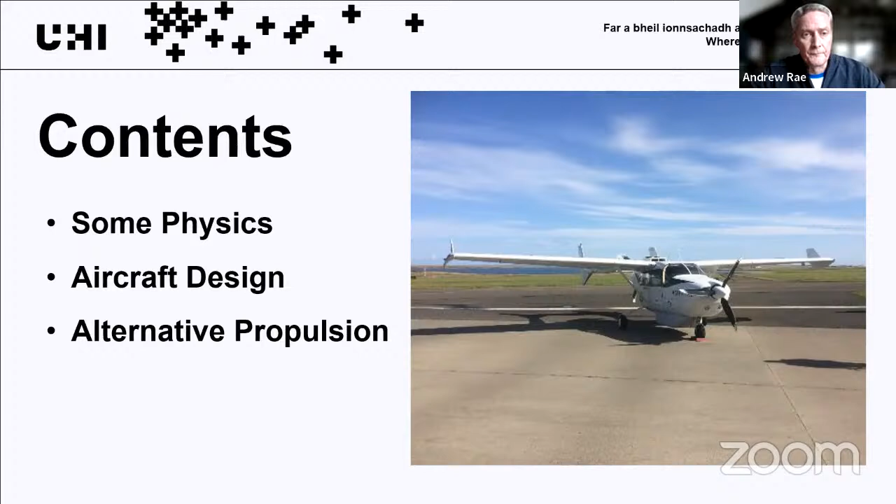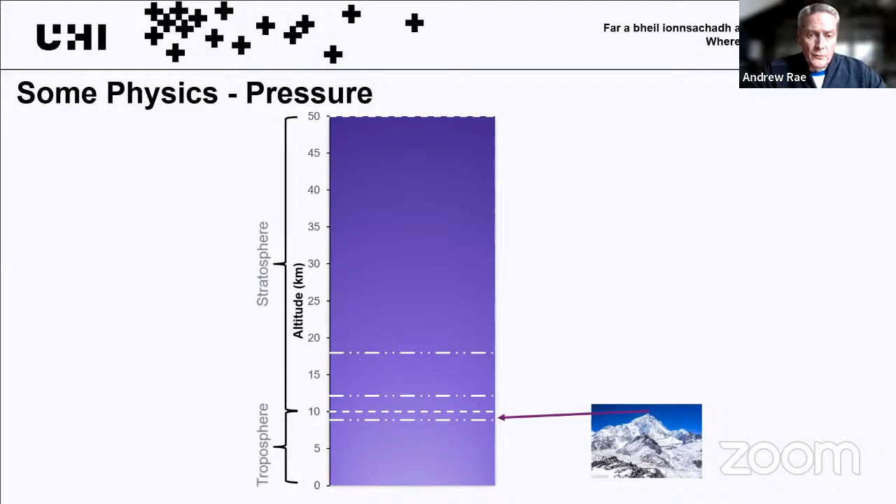So starting off with some physics and pressure. The Earth's atmosphere is split up into regions demarcated by height. The one that occupies most of us is the troposphere, which is up to 10 kilometers in altitude.

But most aircraft fly in the stratosphere. The A380 cruises at around 30,000 feet, plus or minus a bit, which is where most airliners fly these days. Everest is about 8 kilometers high. One of the few exceptions as far as aircraft was concerned was Concorde, which flew at 60,000 feet for a variety of reasons. Obviously, as you go up in altitude, the air gets thinner and the density decreases.

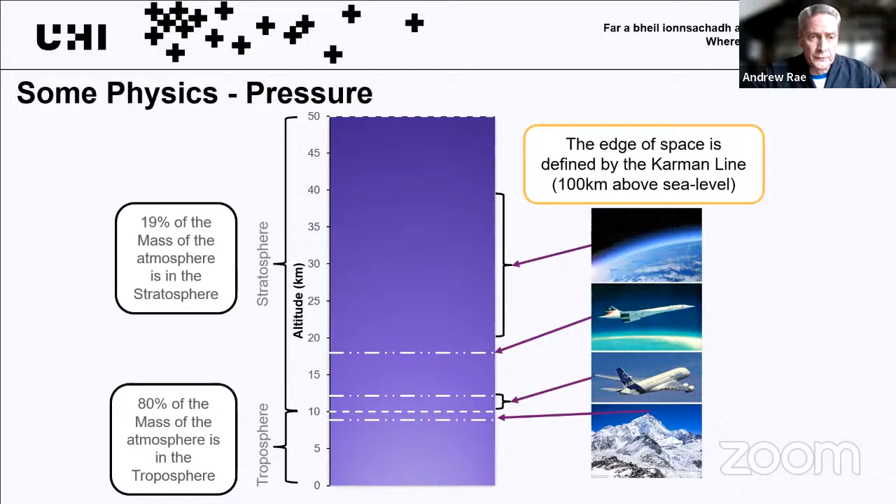So the mass of the air is changing, which has implications for lift, for drag, and for temperature, and I'll come on to those. The density of air is highest closest to the Earth, and decreases as you go up in altitude. About 80% of the mass of the atmosphere is contained within the first 10 kilometers altitude - that's the troposphere. Only 19% of the atmosphere's mass is in the next 40 kilometers of altitude, which is the stratosphere.

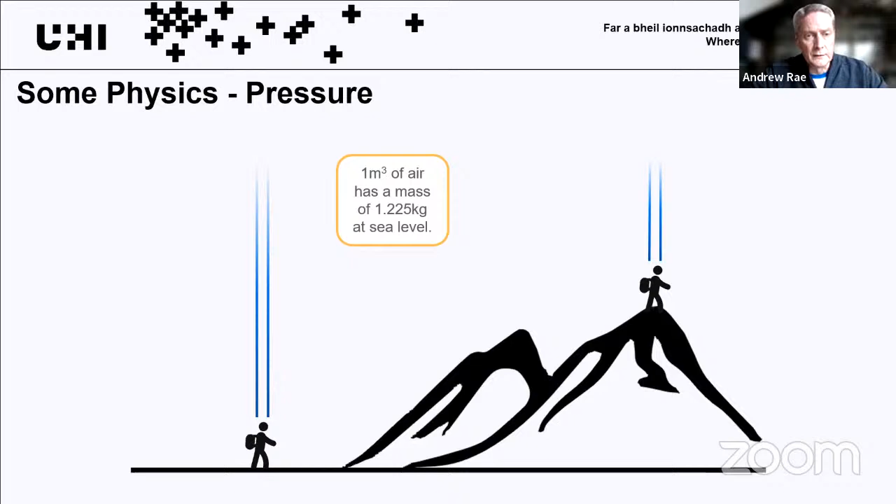So if you imagine a column of air extending from above your head to the edge of the atmosphere - each cubic meter of air has a mass of just over a kilogram at sea level, and that decreases. So to the edge of the troposphere at 10 kilometers, that's more than halved - it's down to 0.4 of a kilogram per cubic meter. And in the middle of the stratosphere, it's right down to 0.018 of a kilogram. So you can see how quickly the density reduces.

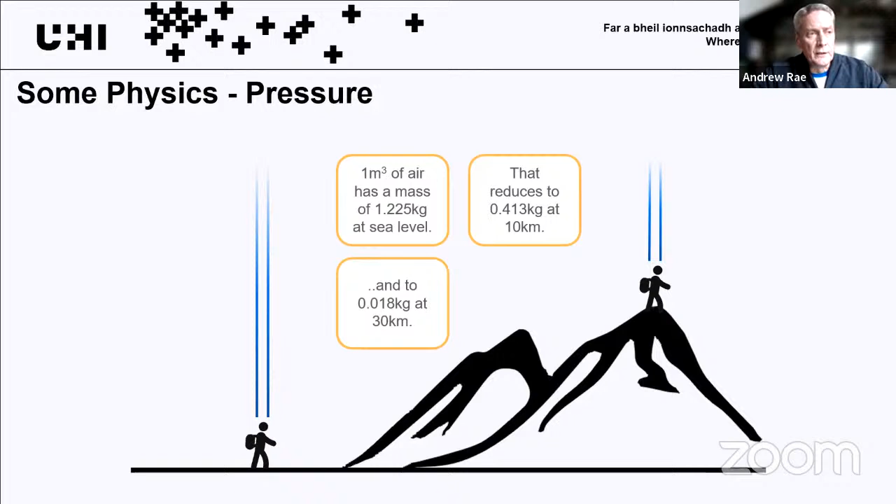If you were to integrate that mass from the top of your head all the way to the edge of the atmosphere, it's equivalent to 7 Ford Focuses - other small family cars are available - but that's quite a weight sitting on your head. Obviously, humans are designed to cope with that pressure, but if you were to climb a mountain, go up to the top of Everest, it's equivalent to only 2 family cars. So there's a massive difference in the density of the air as you increase in altitude.

And of course, you'll all be aware of how that pressure varies. If you climb a hill in a car, your ears pop, or if you go up in an airplane, your ears will pop, and that's to do with the drop in density and therefore the drop in mass above your head, and the pressure.

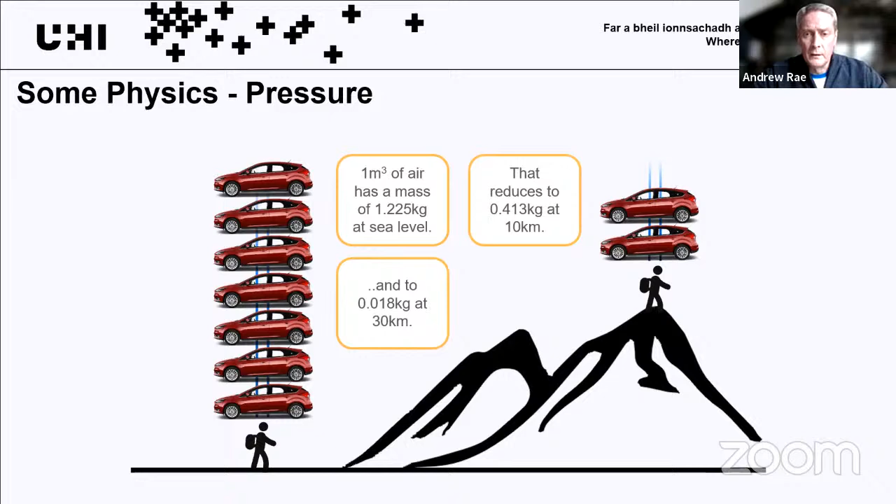So the other thing that varies with altitude is temperature. As you move away from the Earth's surface and the heating effect of that surface, the temperature drops, and it drops quite significantly to well below 0 as you go up in altitude.

There's several different temperature scales that we use. We use degrees Celsius and Kelvin. Fahrenheit is an interesting one. I think 0 Fahrenheit is the freezing point of brine, and the upper point was Mrs. Fahrenheit's armpit, which is probably not the most scientific of datum points, but I think it was changed shortly afterwards to come up with something a bit more constant, perhaps.

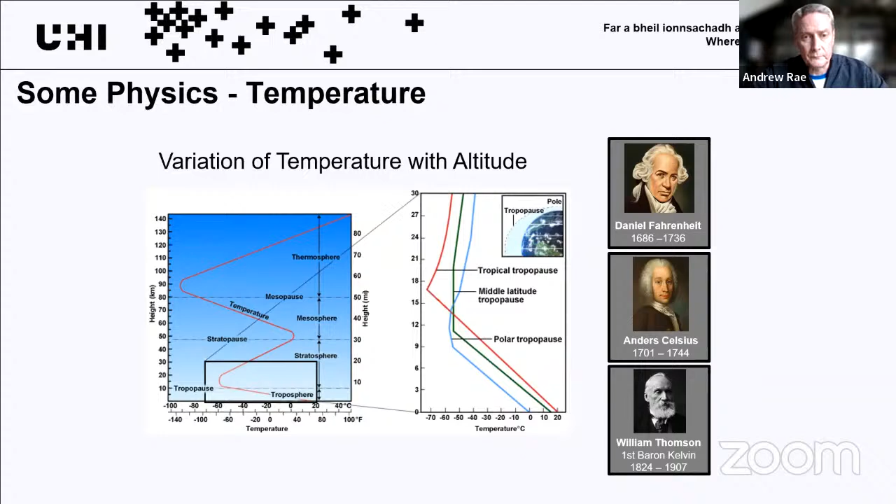Temperature is important because something like Concorde, which flies very fast, has a lot of what's called kinetic heating, so the friction of the air on the surface of the aircraft heats it up. The reduction in temperature at altitude helps counteract that kinetic heating and stops the aircraft expanding too much or getting too hot. I'll touch on friction a bit more shortly.

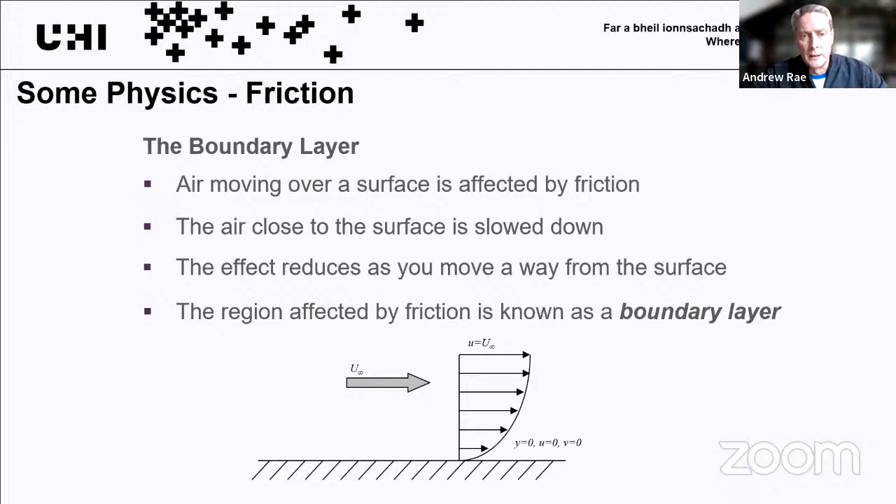Aircraft wouldn't fly without friction. Any two objects moving adjacent to each other will have some degree of friction, and air is no different. It may feel nice and thin and gaseous, but actually there is friction. As the wind blows, you'll have felt it on your face. What that does is reduce the speed of moving air close to a surface, and the area affected by that friction is what aeronauticists call the boundary layer. That's a significant part of aircraft design — understanding and adapting that boundary layer.

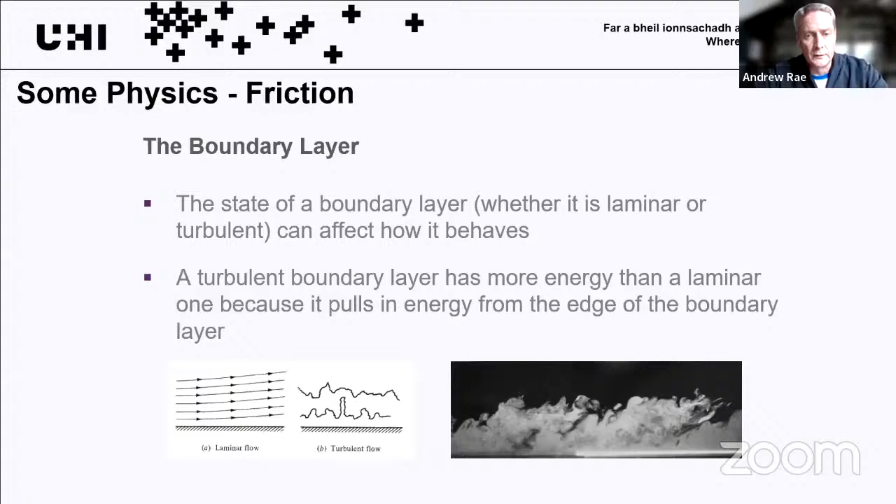Obviously it's not a wire — it's quite tricky to put a wire around a small ball, especially if you play golf as badly as I do, since the ball will be spinning and the wire won't be in the right place. But by putting dimples on it, we create that turbulence, reduce the wake, and the ball will go further.

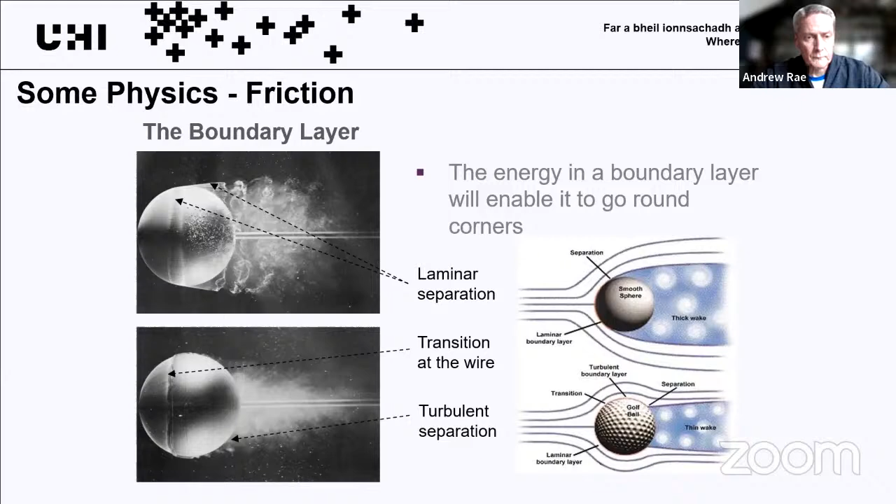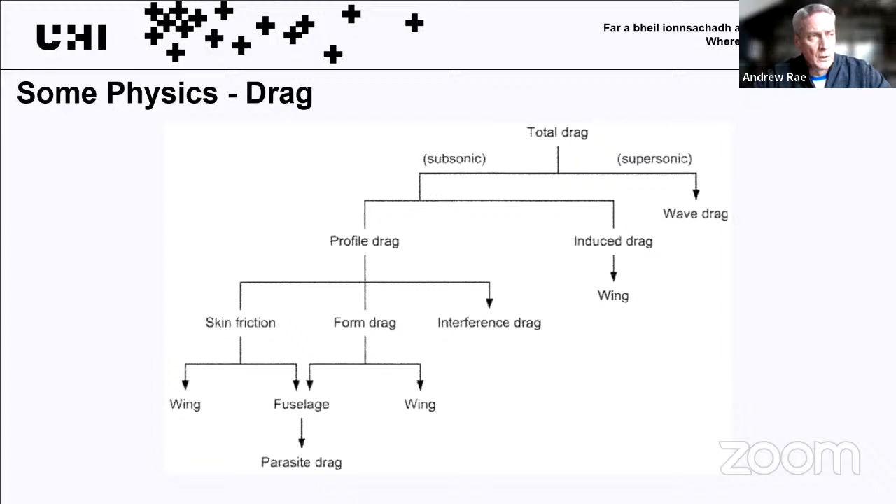On the left-hand side here, looking at subsonic aircraft, the skin friction is the boundary layer. Form drag is the shape, so whether it's streamlined or not, and interference drag is caused by junctions, for example where the wing meets the fuselage or where the engine pylon meets the wing. So there are several sources of drag, all of which need to be minimized.

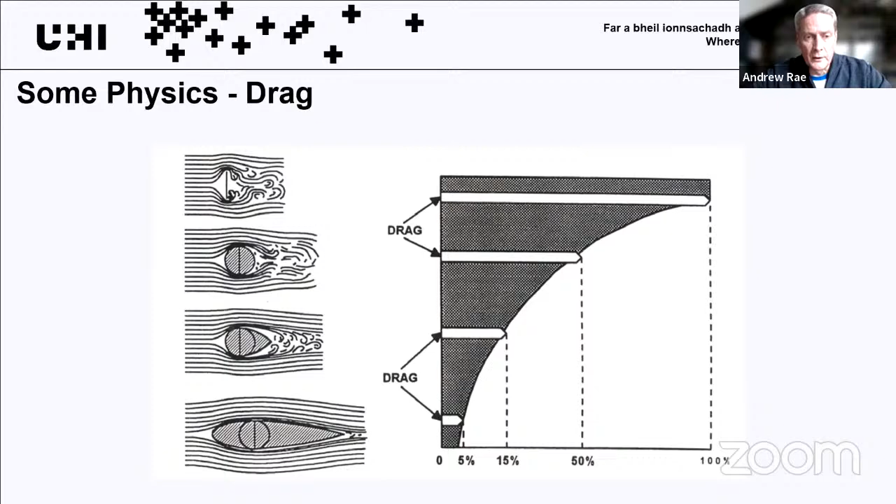Just a little schematic diagram to show how streamlining can reduce drag considerably. If you take a flat plate and put it sideways onto the air, as the top picture shows, you get a very large wake and a lot of drag. If you progressively make that flat plate more streamlined, turning it into a sphere, then a teardrop, then an airfoil shape, you can get down to less than 5% of the drag of the flat plate, even though it's got the same frontal area. That's a lot of the reason why cars are streamlined, and why aircraft are streamlined where they can be.

In straight and level flight, the lift you need will be equal to the weight, and the thrust from the engines will need to equal the drag of the aircraft. The lift and the drag both vary with what the aircraft is doing.

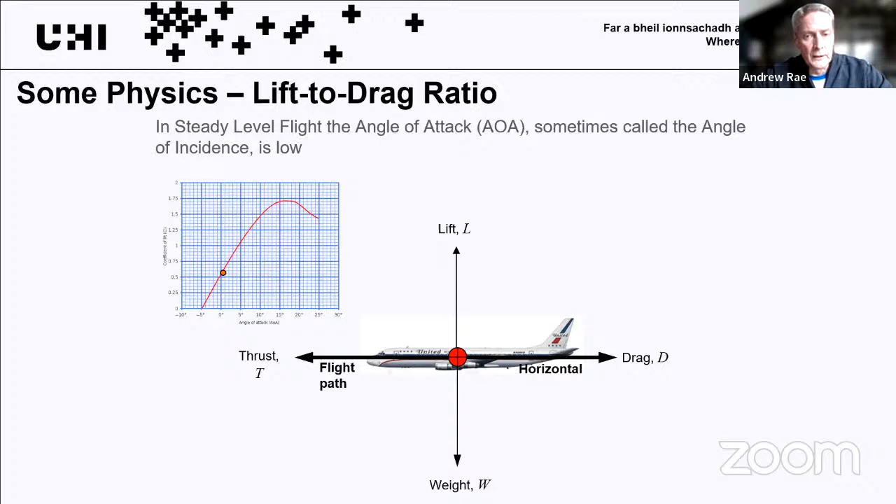If we pitch the aircraft up, maybe to climb, we increase the angle of attack, we also increase the lift, and therefore also increase the drag.

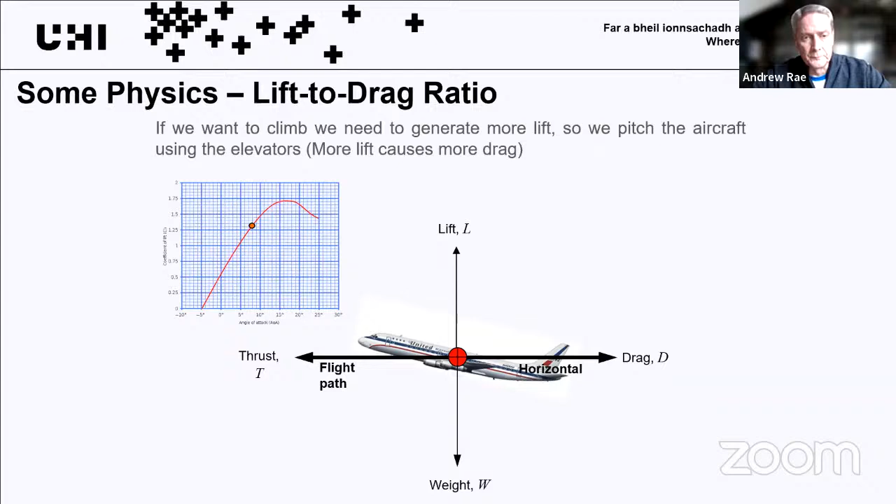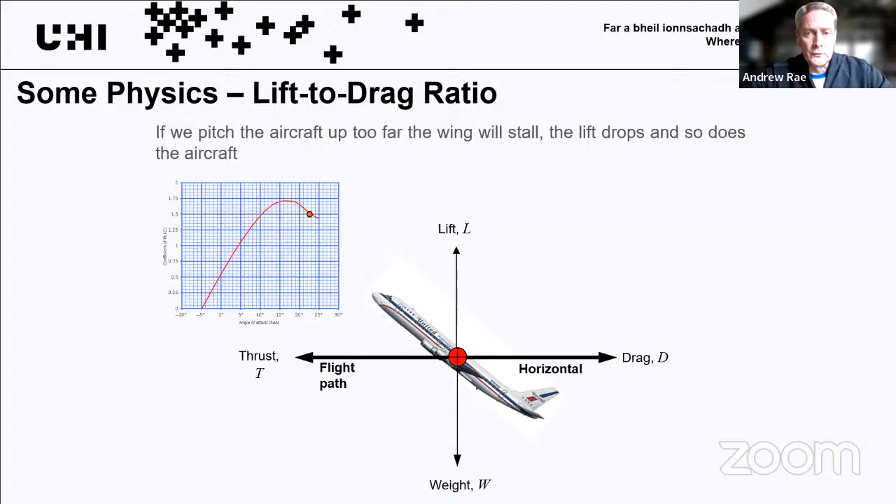If you take that too far, you can stall the aircraft, so the lift drops, but the drag goes up massively. The lift drops, and so does the aircraft.

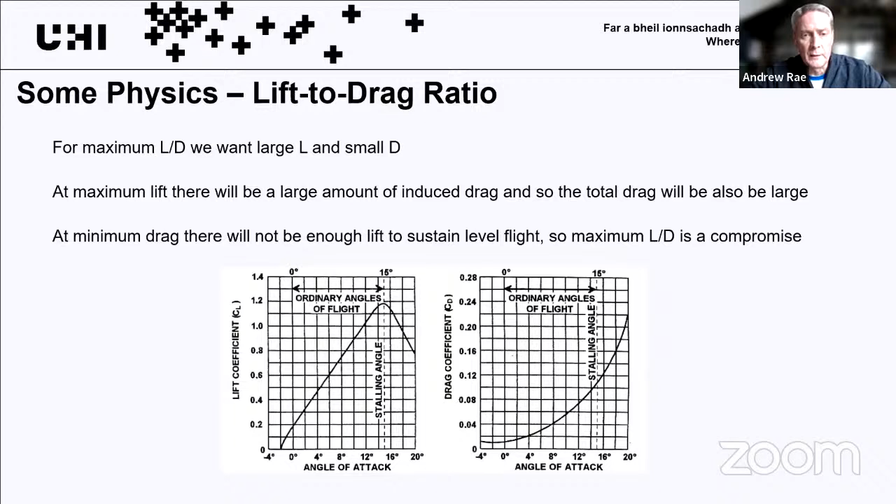Lift and drag are related, and an evaluation of the efficiency of an aircraft is the lift to drag ratio. The bottom left-hand picture shows the lift increasing with angle of attack, and on the right shows how the drag increases with angle of attack as well. Both increase with angle of attack, but they do it differently.

As you plot lift against drag and angle of attack, you find there's a sweet spot, which for most civil aircraft is around about 2 degrees angle of attack. Most wings on most airliners are bolted onto the fuselage at about 2 degrees because that's where they operate most effectively in cruise.

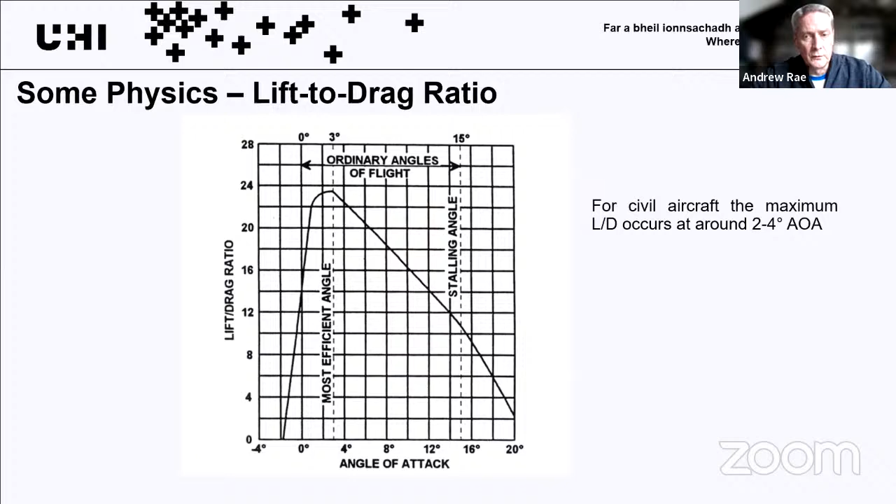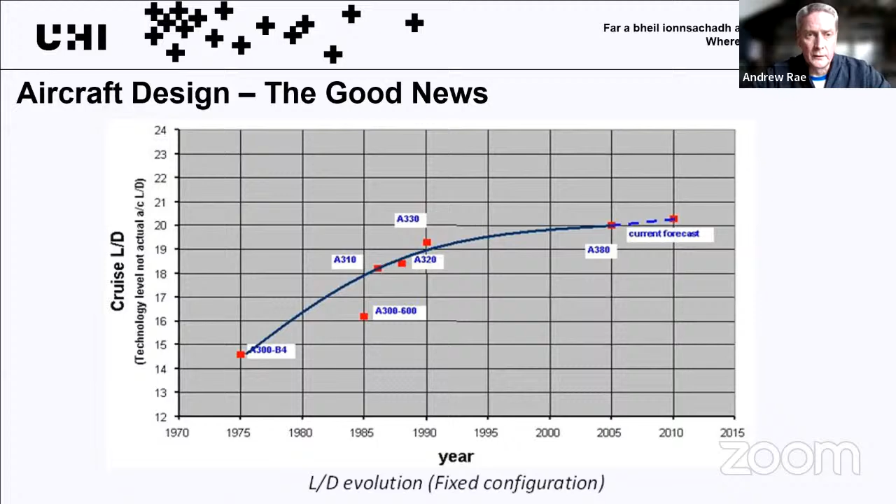What that means is that for the same lift, the drag has dropped by about a third. And that's good news because you need less thrust to overcome that drag, so you burn less fuel. But this was done not so much from a sustainability point of view, but more from a reducing cost point of view. So that's one of the things that's changed in the last decade or so. That's the good news.

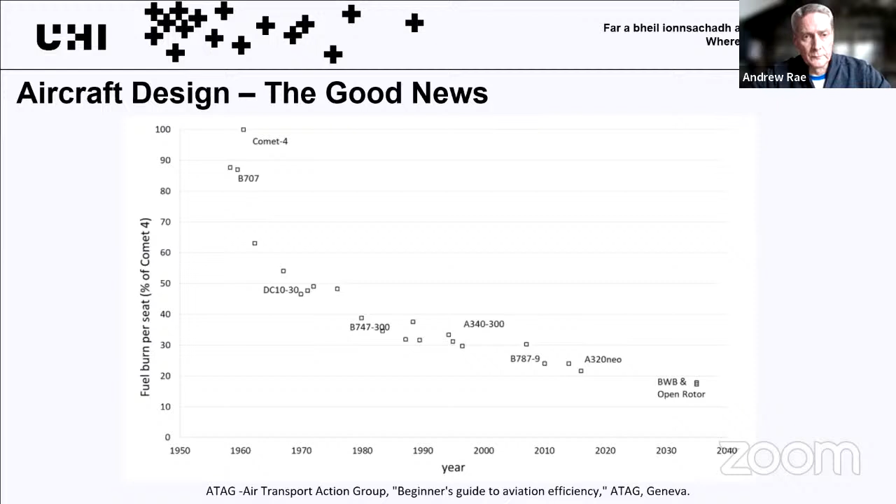The other thing is that efficiency has increased. If you take the amount of fuel burnt per passenger per kilometer, you see the downward trend since the first jet aircraft, the Comet 4 and the 707, are top left there. If we take the Comet as 100%, then the A320 is down around a fifth of that fuel burnt per seat per kilometer. That's a massive saving. So the efficiency's gone up, the fuel burn's gone down. As I said, that was largely to do with cost.

Bad news is that the number of people flying has gone up massively. The number of aircraft in the sky has gone up massively.

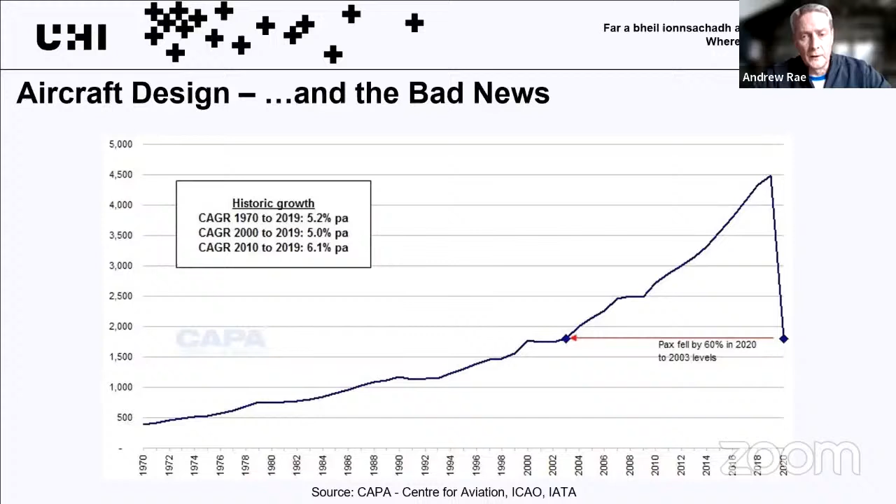Since the 1970s, there's been a tenfold increase in the number of passengers flying. Obviously COVID affected that, but even then it only fell back to 2003 levels of passengers flying.

Predictions are that if nothing else changes, that upward trend is going to continue. There's a massive increase, depending on which forecast you believe, but there is always going to be an increase in air traffic. So we need to do something.

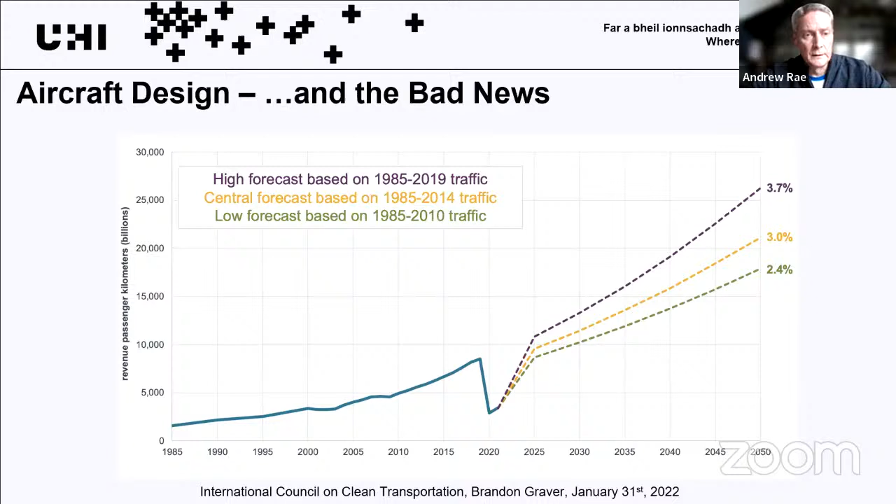It's not just the amount that's being burnt, it's where it's being burnt. Burning kerosene at 30,000 feet is not a good idea because of the particles that come out of the engine from the burnt fuel, and contrails that form which also help affect global warming.

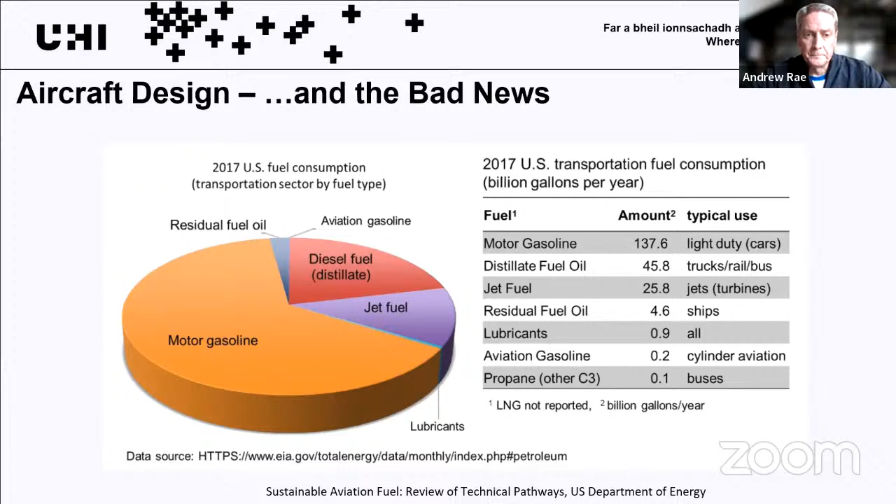As you're probably well aware, governments have latched onto this and are incentivizing aviation companies, aircraft builders, and engine companies to do something about it. Aviation needs to change - we can't carry on doing what we're doing. So the desire to try out alternative powertrains especially has come front and center. We're now doing it for the battle on climate change rather than to reduce costs.

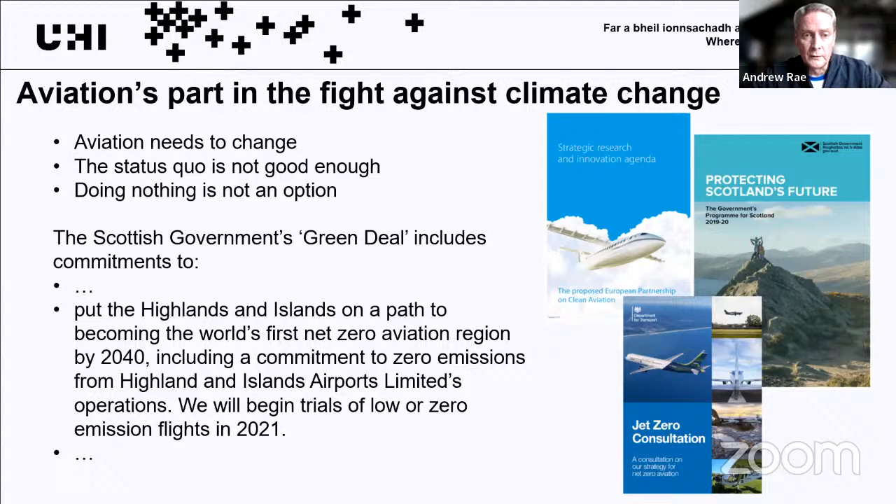Included in that set of reactions has been the Scottish Government's Green Deal, which has mandated Highlands and Islands Airports Limited to create a zero emissions aviation zone by 2040. That led to the setup of the Sustainable Aviation Test Environment project, which you may have seen David Holden, Dougie Cook and others talk about today as well.

The trouble is there's no silver bullet to replace the burning of dinosaurs. The most common proposed alternatives include hydrogen as a fuel, in two forms: liquid at cryogenic levels, or as a gas.

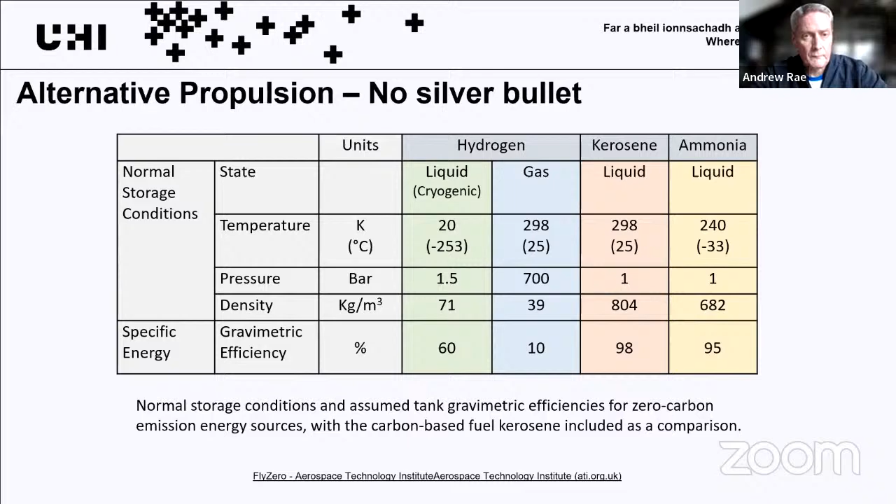If we concentrate on hydrogen, the other proposed alternative is sustainable aviation fuel. That's a kerosene-like substance which isn't a fossil fuel - it's grown from various feedstocks, including biomass.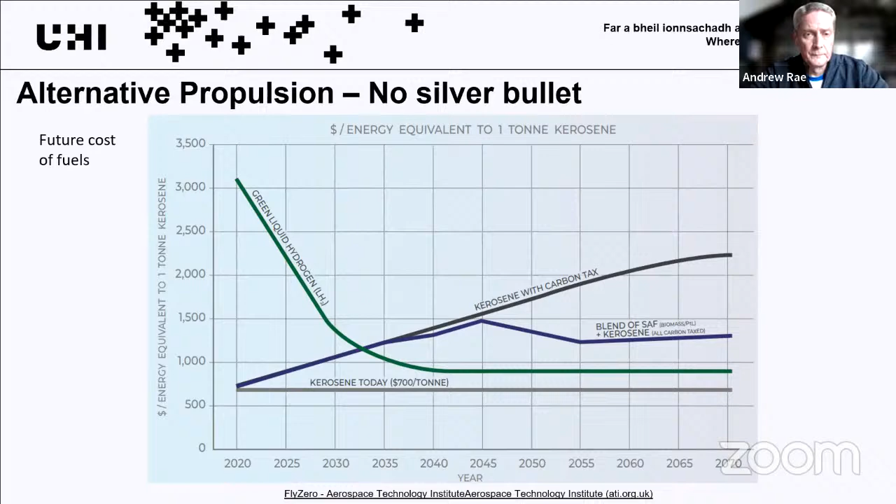Currently the cost of hydrogen is massive compared with kerosene - the grey line at the bottom is kerosene. It's a bit of a catch-22 situation because the amount of hydrogen being produced is quite small, so the cost is high, so it's not being used very much. We need an economy of scale and some way to kickstart that reduction in cost. But even at scale, liquid hydrogen will be more expensive than kerosene is today, so there will be a cost implication here even if we can solve all the technical issues.

This chart really shows the challenges for aircraft designers. On the bottom axis is the mass energy density of fuel - how much bang you get per kilogram. On the left-hand side is the volumetric energy density - how much bang you get per litre, per unit volume. Ideally you'd like something with a lot of energy per litre and a lot of energy per kilogram, because then it won't weigh much and it won't take up much room.

Kerosene is in there too - that leads you to the top right-hand corner of that graph, if you had the perfect fuel. Kerosene is quite good from a mass density point of view, and it's very good from a volumetric point of view.

Draw your attention to the bottom left, which is where you've got lithium-ion batteries. They are neither volumetrically nor mass efficient - they are heavy, and the energy density per kilogram is not great, nor per volume. So they will probably be limited to small aircraft.

On the right-hand side at the bottom, we have hydrogen, liquid and gaseous. They are energy mass efficient - they're on the right-hand end of that bottom curve - but they are volumetrically challenging, at the bottom end of the y-axis there. So these alternatives all have consequences for aircraft design, which I'll come on to.

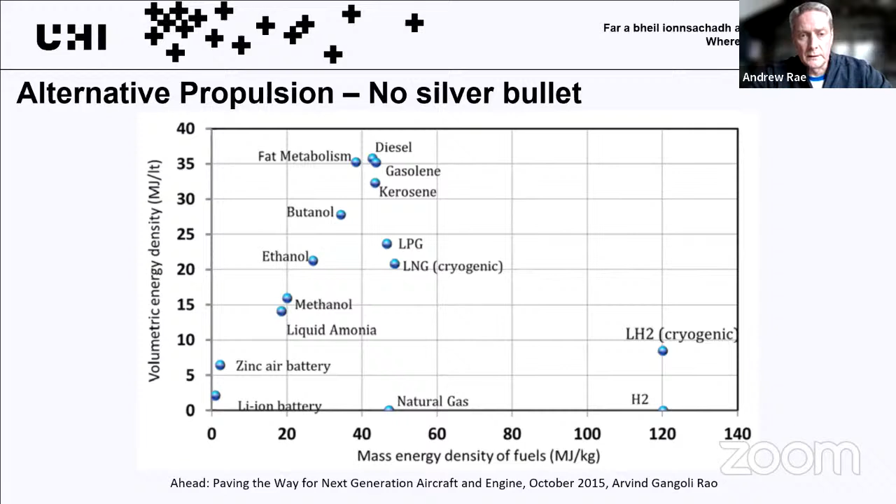Hydrogen is being proposed in two ways generally. One is to use it as a replacement for kerosene, burning it in a combustion chamber in the same way you use kerosene or avgas now.

The trouble with that is that you're still burning air, so the fuel-air mixture is still burnt, and so you're producing a lot of the particles and greenhouse gases that current gas turbines produce.

The right-hand side there shows an alternative, which is one that the likes of ZeroAvia are doing. They have a hydrogen fuel cell which drives an electric motor. So that's a much cleaner way of doing it, but you need to be able to refuel the fuel cell to keep producing the thrust.

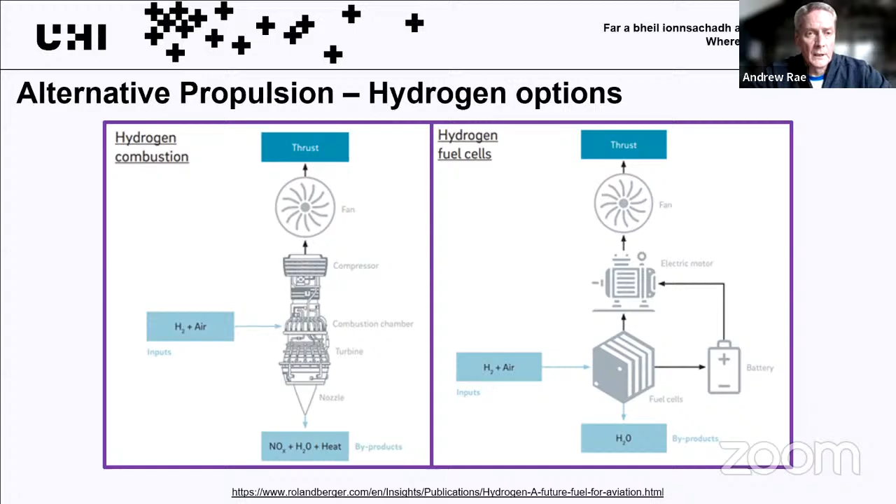So I've mentioned the volumetric challenge. So 2 aircraft here, the ATR, which you'll be familiar with if you've flown with Loganair recently, and then the A320, which is the common mid-sized aircraft. The coloured blobs there are the volume of fuel tanks you'd need to replace kerosene. It's not too bad on something like the ATR 72, which is short range - the volume is bigger for these alternative fuels, but not massively bigger. That's not true for longer range aircraft like the A320, and it's even worse for intercontinental aircraft. You can see the size, or a representation of the relative size of the fuel tanks in the coloured blobs at the bottom, bearing in mind that you need 2 of these to give you enough fuel for your mission.

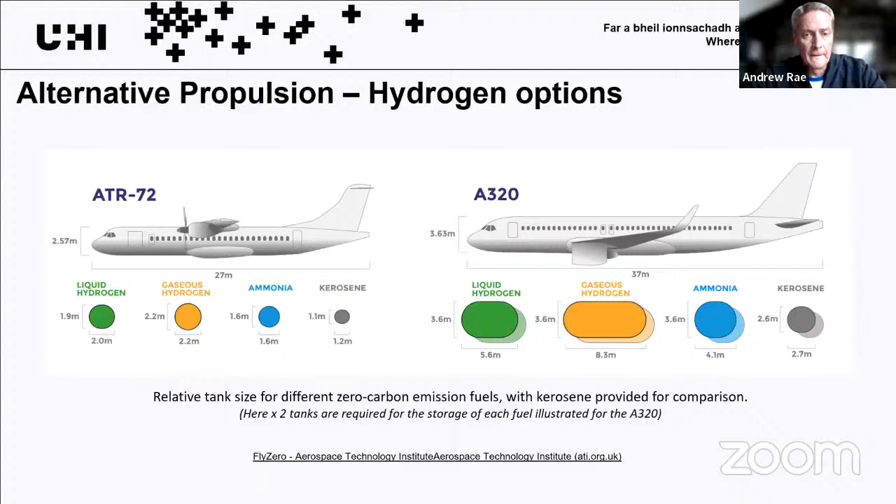And hydrogen's tricky stuff. It's a single molecule, which means it's really hard to keep it in one place. It likes to leak through any gaps or even through most materials, and that has issues for safety and maintenance. So if hydrogen wants to get out of where you're trying to keep it, it will collect elsewhere. If you're doing maintenance in a hangar, for example, on a fuel tank, and you vent the hydrogen, it will find its way to the ceiling, which is where most of the lights are, and one spark will set it off.

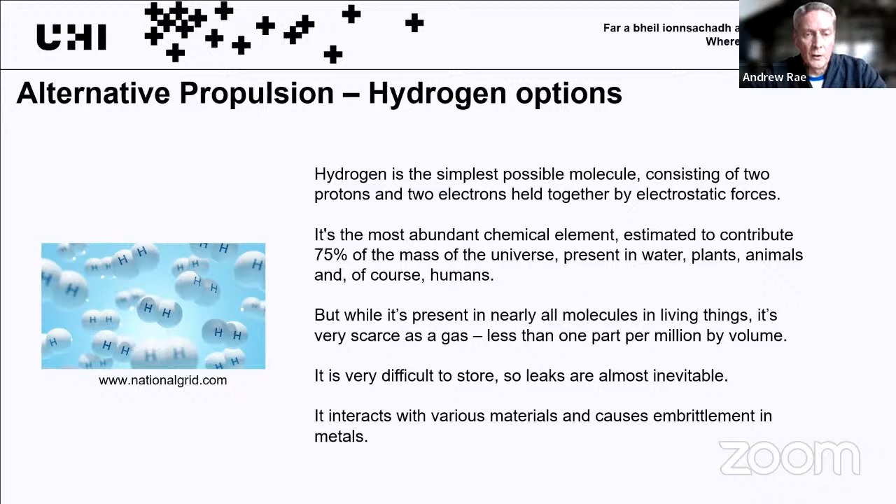So it's very abundant, but actually getting it into gaseous form is quite hard. And it also has the nasty trick of interacting with other materials. So those of you familiar with the oil and gas industry will have heard of hydrogen embrittlement of pipelines, for example - the hydrogen in the hydrocarbon embrittles the inside of a pipe and makes it won't be able to withstand the same loads or vibration or similar things.

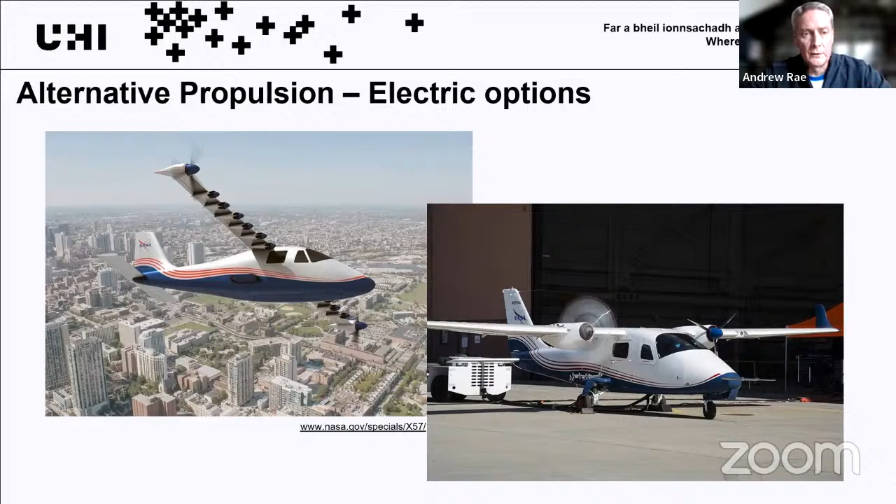The current reality is somewhat different. The bottom right-hand picture there is the actual aircraft. It's not quite got the distributed electric propulsion, but it does have an electric powertrain on it. So small steps towards a more ambitious target.

So have you ever seen the inside of a battery, a large lithium-ion battery cell? It is a collection of hundreds, if not thousands, of AA cells all linked together. One of the problems which you've probably all seen is thermal runaway - once a lithium-ion battery starts burning, it's very hard to put it out.

It also suffers from traditional battery ailments such as charge memory. So if you don't cycle it correctly, you can damage the cells and it won't charge fully. At the moment, lithium-ion batteries are thought to have a lifetime of about 2,000 to 3,000 recharging cycles, which if you're using an aircraft every day, means that after about 6 years, you'll need a new battery.

And the other big problem is the constituent materials. In the chart on the right-hand side, there is a list of component materials within a lithium-ion battery. Some of them are rare earth elements, and the clue's in the name - these things are difficult to get. There is a limit to how much there is of them, and in some cases where they come from is going to be a challenge. So electric is not a perfect solution in the same way that hydrogen is not a perfect solution.

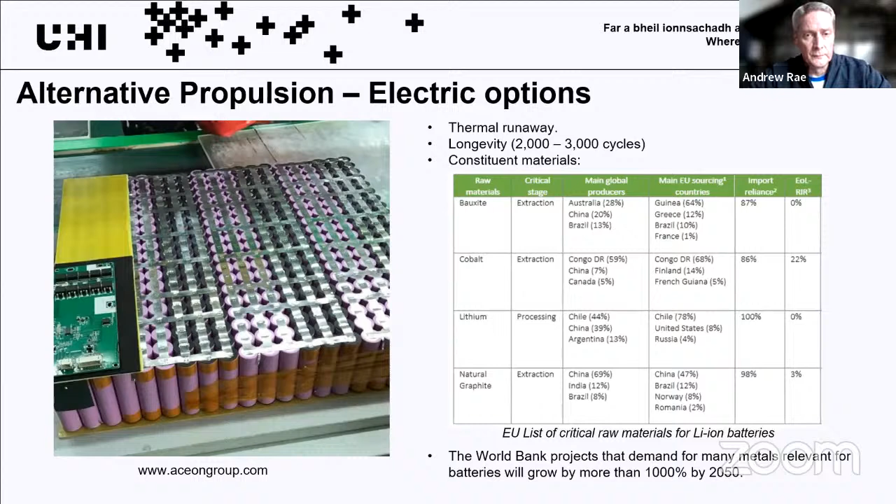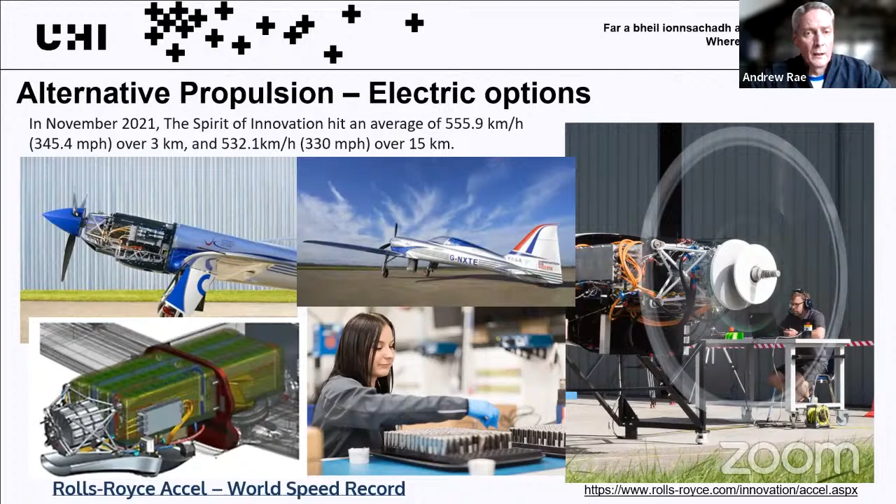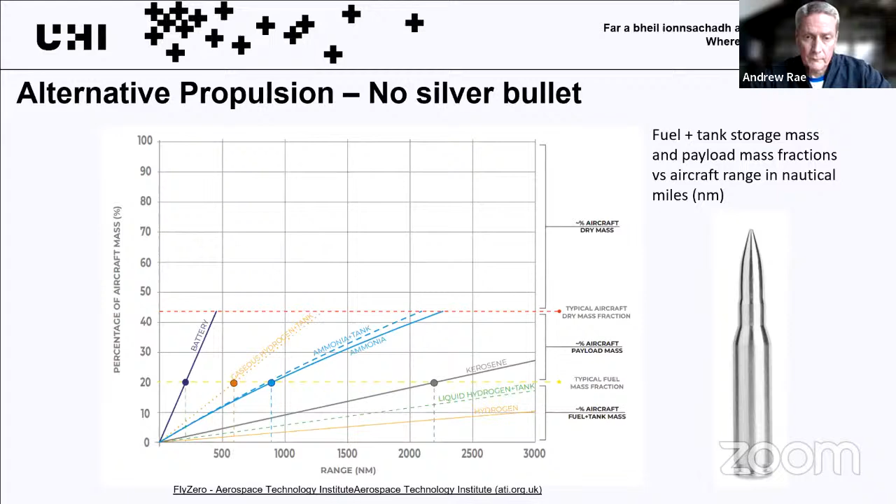Hydrogen electric, as with the ZeroAvia one, will give you more range, but still not huge. At the moment, the only foreseen solutions for longer range aircraft are either hydrogen or dropping in sustainable aviation fuel as a direct replacement for kerosene.

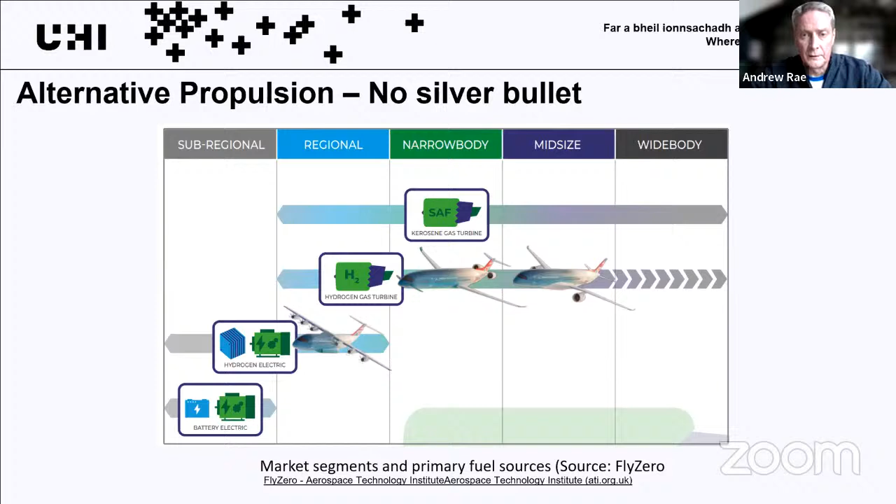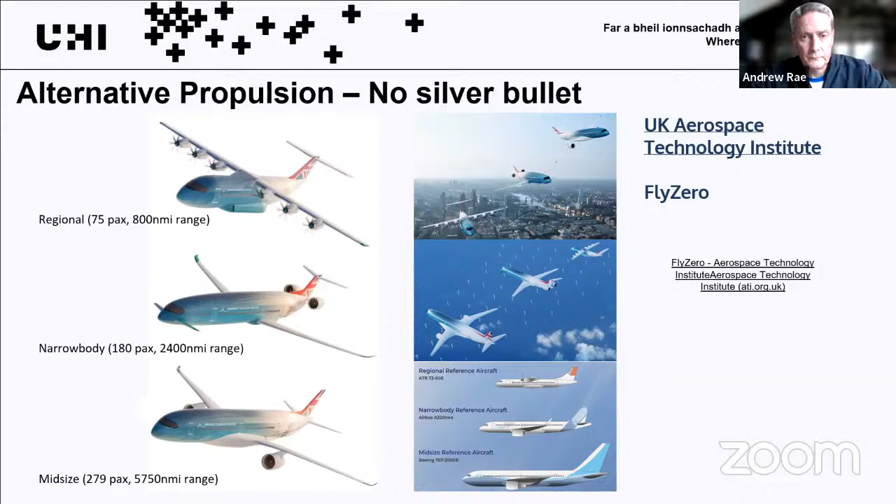Next slide, please. But remember, the volumetric problem of hydrogen means you've got to have massive fuel tanks. This is a section through one of those concepts, the medium range one, if I remember rightly. You can see the green areas are the hydrogen fuel tanks - so they are rather large.

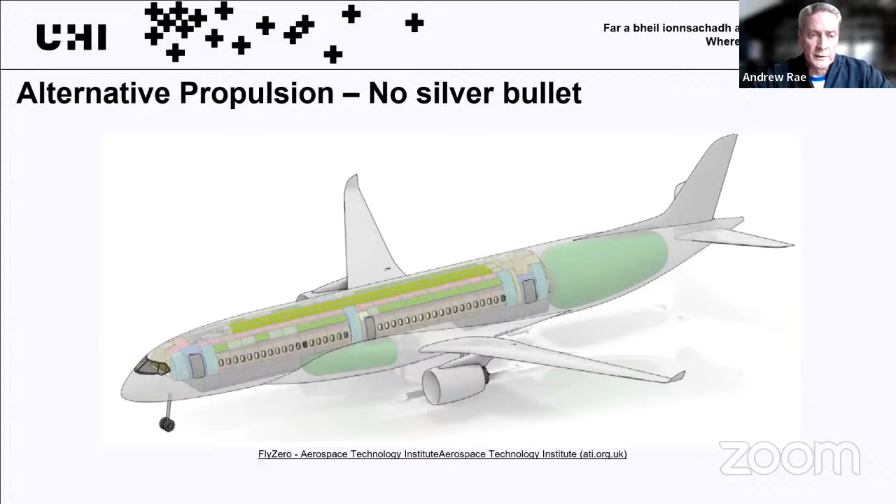That's assuming that you can come up with materials to safely store hydrogen in an aircraft right next to a passenger cabin, that you can refuel it happily, and that it won't leak into places you don't want it to leak. Next slide, please.

But we have to start somewhere, and so ZeroAvia are pioneering hydrogen-fueled aircraft, and will bring their Dornier 228 hopefully to Kirkwall in the next 2 years as part of the SATE project. We've already had Ampaire's hybrid electric aircraft, which is a modified Cessna 337. The front engine here has been replaced by an electric motor, while the rear engine is still a conventional Lycoming avgas aircraft. The reason for the 337 was because it gives you twin engine safety, but the two engines are in line, so you don't get any asymmetric control problems with an engine failure.

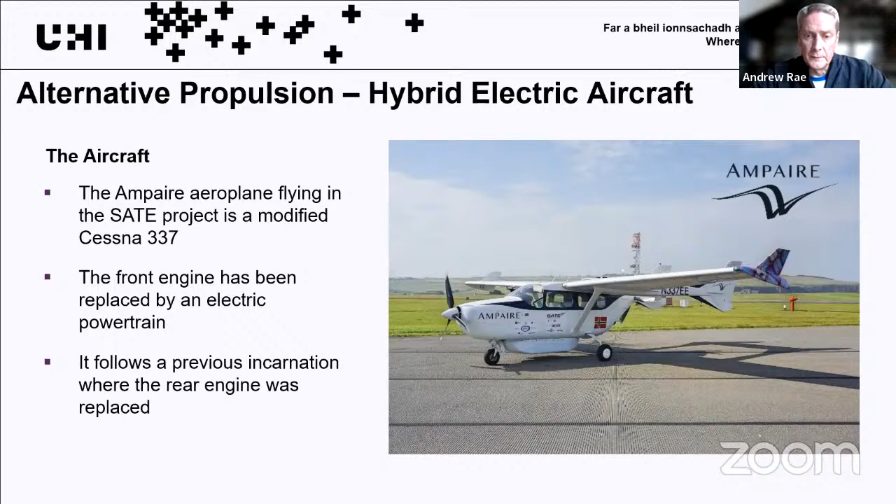One of the problems we had was that this setup is somewhat lighter than the Lycoming engine it replaced, and normally we'd move other bits around to compensate for that change in center of gravity. The easiest thing would have been to move the battery pack forward, but the nose gear was in the way, so we were limited. In the end we had to put a cast iron plate in the engine bay to balance the aircraft back out. It's the first time in my entire aircraft design life that we've deliberately added weight to an aircraft rather than trying to take it out.

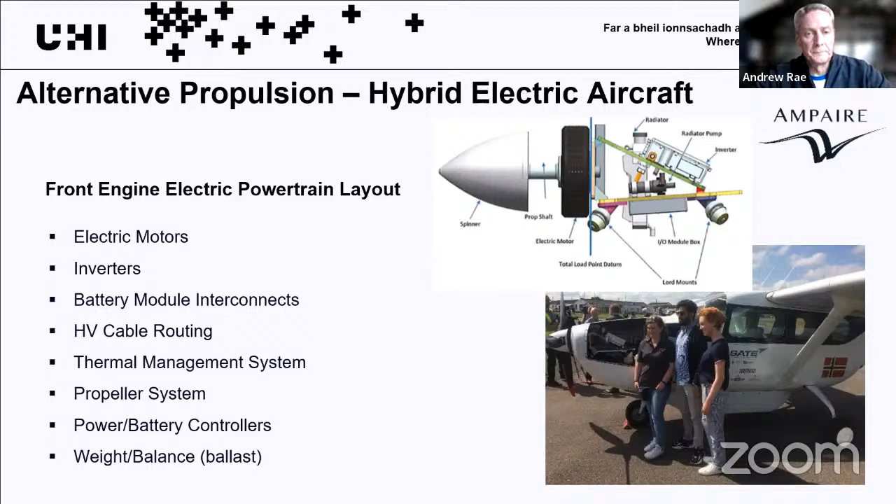Just some nice videos of Ampaire's aircraft. This is flying in California. It did 24 flights over a period of about a month. Nothing failed, and it accumulated 33.5 flight hours.

Ampaire are based at Hawthorne Airport in the US, in Los Angeles, which, for those of you who are an anorak like me, is where Northrop used to be based. It's where the flying wing concepts were first developed and test flown.

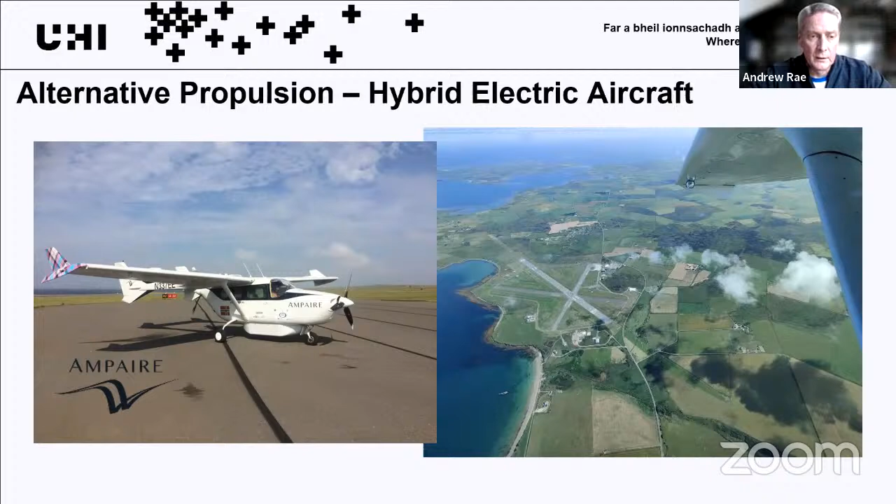Once we'd finished in Wick, we took the aircraft down to Devon and Cornwall. The aircraft was fitted with a US transponder which broke somewhere near Perth. It landed at Perth, had a replacement UK transponder fitted, then flew down to Exeter and did flights between Exeter, Newquay and Land's End. So the aircraft has flown literally from John O'Groats to Land's End, and that 418 nautical mile flight from Perth to Exeter was at the time a world record.

It's been broken by the same aircraft flying from Los Angeles to Oshkosh to take part in AirVenture just last month.

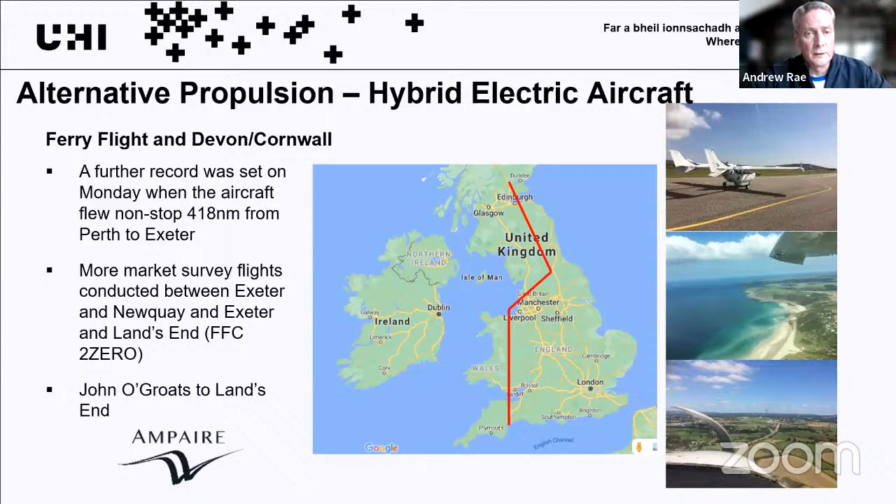Some of the more mundane challenges that exist: as with electric cars, unification and standardization of charging is going to be critical. There's no point having an electric aircraft if you land at an airfield and you've got the wrong plug on the end of your charger. It won't fit in the wall.

SAE, who look after a lot of automotive and aviation standards, are working towards standards for electrified aircraft propulsion. A lot of that work's been done in the US, and Ampaire is actively involved in that. It's not only the shape of the plug, it's the voltage you use and the safety systems around it.

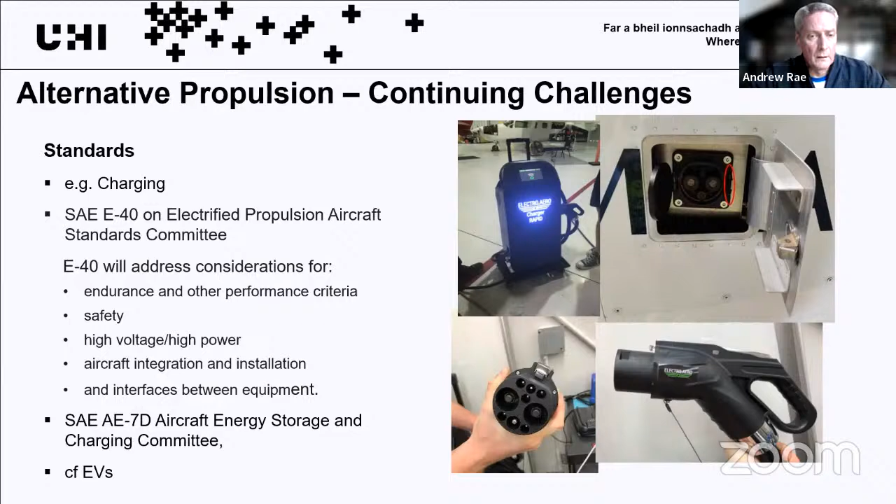Some of this was touched on earlier, especially with David Holden's talk around infrastructure and energy. It costs money to install charging infrastructure for electric aircraft, and it costs money to install electrolyzers for creating hydrogen. So how does an airport that has to pay for that get its money back, while at the same time not putting people off from buying and running zero carbon aircraft?

Why would an airline buy a more expensive aircraft? So there needs to be a bit of carrot and a bit of stick to incentivize the airports and the airlines, and passengers even, to use these aircraft.

There's no point having zero carbon aircraft if that energy doesn't come from renewable sources. One of the excellent things about flying in Orkney is that we have access to lots of green energy. There's the electrolyser, the hydrogen production plant on Eday, and lots of other interesting renewable activity going on in EMEC with wave and tidal as well.

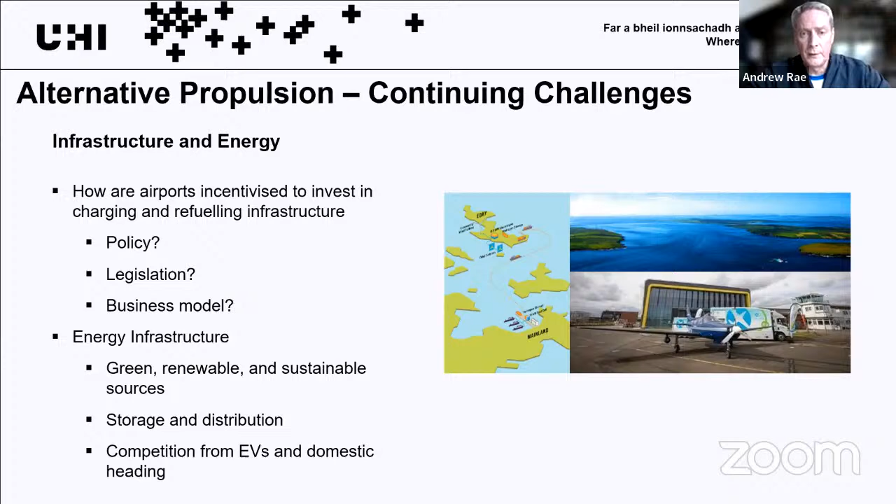But that's not going to be so easy to achieve in other geographies, more landlocked or more urban ones. So that needs to be understood about how that entire energy system links together, especially if aircraft are competing with electric vehicles for their electricity, or if hydrogen aircraft are competing with the domestic heating market to get their hydrogen. Next slide, please.

One of the things that exercised me for about a year and a half was aircraft certification. Every single aircraft will have to have a type certificate to allow it to fly. You need to be able to prove that the aircraft was designed in the right way and is safe. At the moment, none of these alternative powertrains are covered by existing certification processes.

EASA, the European Aviation Safety Agency in Europe, and the Federal Aviation Administration in the US are looking at ways to integrate these powertrains into certification processes. There's a bit of divergence, so it'd be interesting to see where our own Civil Aviation Authority pins its colours, whether it's to EASA or to the FAA. None of them are wrong, they're just different, and they all require different processes.

EASA, for example, are probably likely to require a type certificate for the powertrain, and then every different aircraft that uses that powertrain will need another type certificate. But this is work in progress.

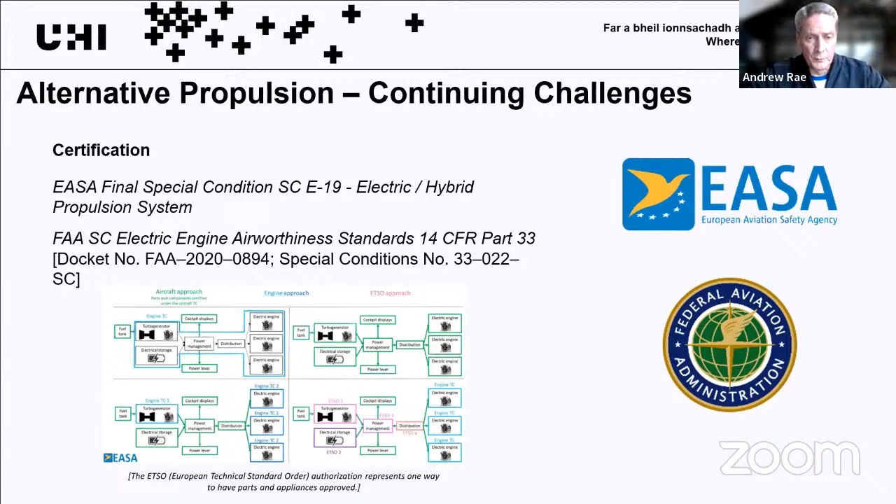As part of the SATE project, we've had a variety of aircraft involved, and most of them have had to use legislation and certification routes that weren't appropriate necessarily to their aircraft. So Flare-Bright's small handheld UAV had to go through some rather interesting hoops to get permission to fly. Next slide, please.

On the airport side, if you've got electric and kerosene together, or hydrogen and electric together, there will need to be guidelines for the safe refueling and operation of those aircraft. At the moment, there are no guidelines. They used to exist, but they've all been withdrawn. So aircraft fueling and refueling isn't covered by any guidelines from the Civil Aviation Authority.

There are some guidelines around hydrogen from the Health and Safety Executive, but that needs to be tightened up, especially where you've got fuel lines adjacent to each other in airport tarmac, for example.

Now, I touched on distributed electric propulsion earlier, so more smaller engines than currently used. There are different failure cases, different classifications of engine. If you've got one battery but lots of motors, is that a single engine aircraft or a multi-engine aircraft? And what happens if you rely on the lift from those engines blowing over the wing? What happens if that stops?

So lots of things still to challenge us. It's not going to get boring anytime soon. Next slide, please.

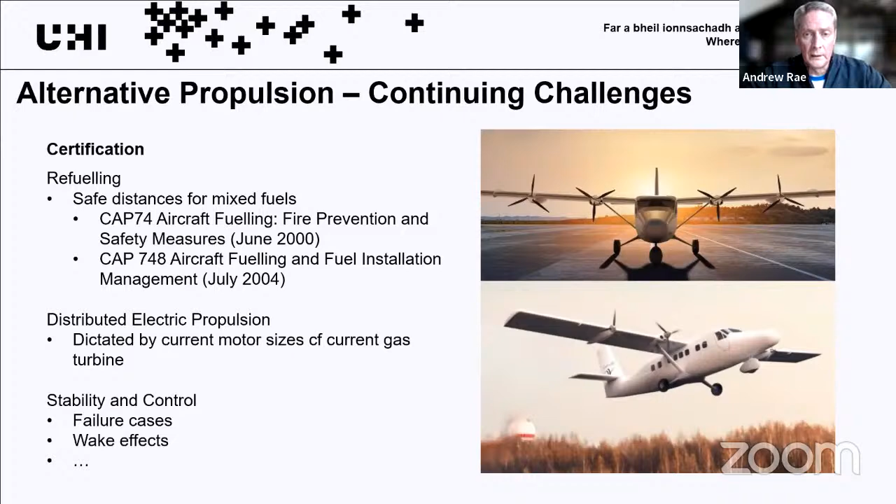But fortunately, change is afoot. These two pictures I've chosen to show how both the technology and the thinking has changed. On the left-hand side is the first ever mobile phone. That big block behind the handset is the battery. Compare it now with what's in your smartphone and the length that would last.

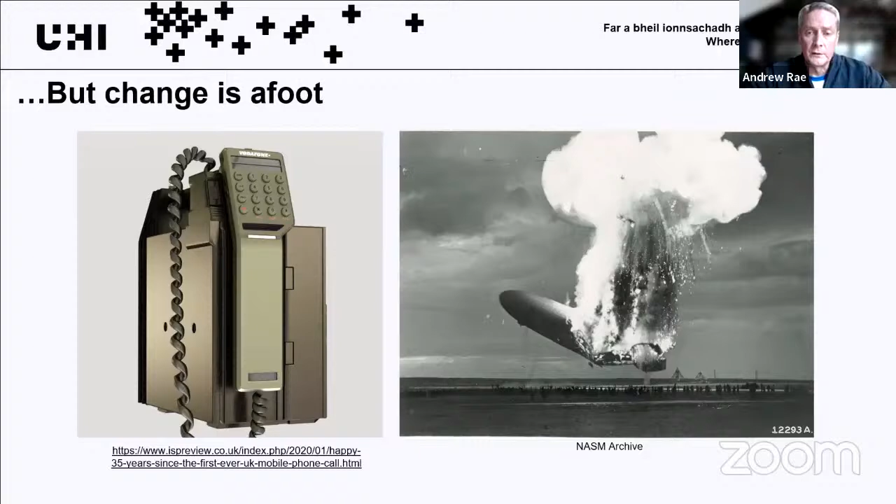Change has happened. And hydrogen still puts the fear of God into some people, largely because of things like the Hindenburg. But hydrogen is being used regularly now in the maritime sector, also in the automotive sector, and that confidence needs to be transferred to the aviation sector.

So next slide, please. So that's me. Thanks very much for your attention, and happy to go for a grilling, as Dave said.